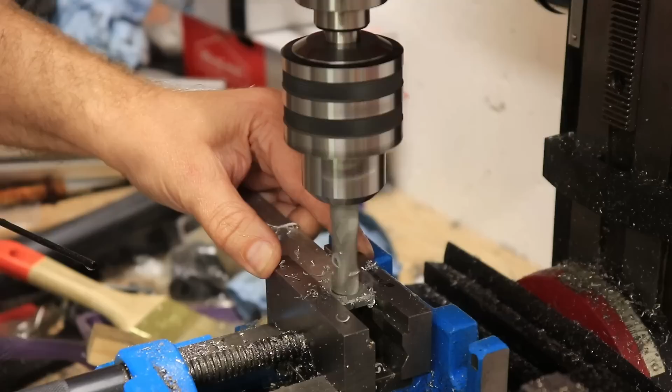My name is Igor and I'm actually curious about this video because I have absolutely no experience with 3D printed metal. I mean, how strong is it? Do we have that weak layer adhesion problem or something like that? And I will compare it directly with the FDM printed objects from ABS.

Now all these test specimens are printed by JLCPCB, and their primary service is manufacturing PCBs, but they also have 3D printing services. And I also presented their SLA and MJF 3D printed objects.

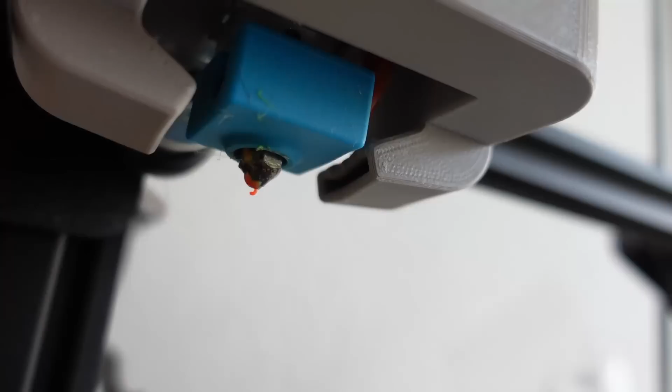I ordered these two to test their possibilities, because sometimes this is hard for printing. You cannot print with the supports because you cannot remove them from inside these channels, and this starts from a very small contact surface, and basically the supports you need only at this part here, and this printing looks really great. And the reason I need this from ABS is because I already printed this from PETG, and it melted here where the hot end doesn't have the covering from that silicone cover.

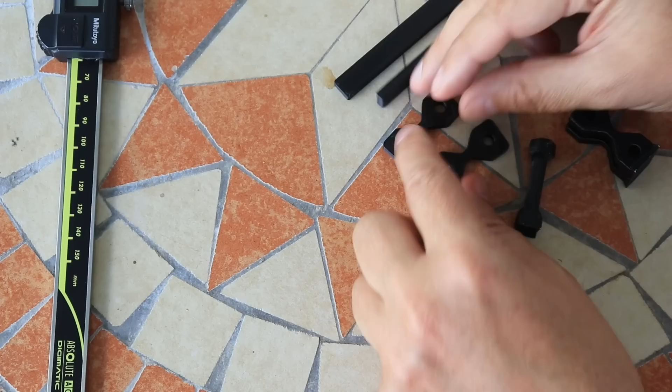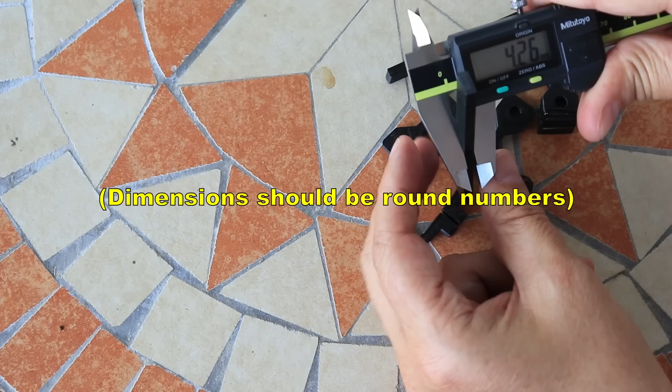And now these are those test objects from ABS for the bending and impact test, tensile test, layer adhesion, grip test, and the torque test. Quick check of the dimensional accuracy. 10.3 by 4.26, a little bit bigger. This should be 10 by 4 millimeters. A little bit bigger in cross section, the diameter. This should be 6 millimeters in diameter, and this is also a little bit bigger. So approximately 0.3, 0.4 millimeter bigger dimensions.

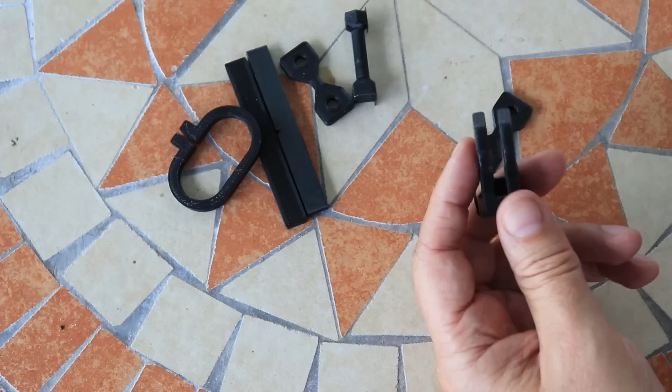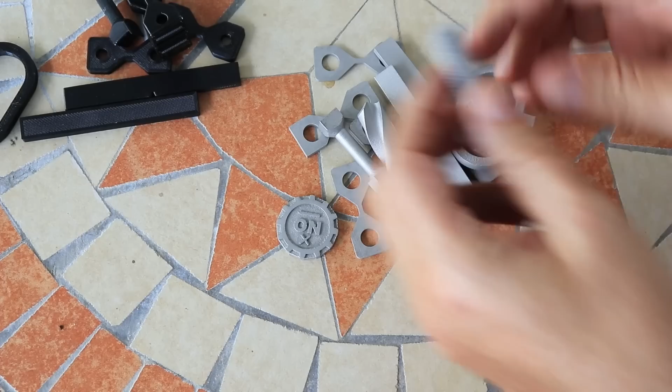So probably they use a little bit bigger flow rate. I hope this will result in better layer adhesion, but we will see that in a few seconds in the testing. Now let's see the metal parts. For the feeling, definitely real metal, and it's heavy. Yes, the coin. Well, this is mostly for aesthetic look, but this coin looks great. And I have two of them.

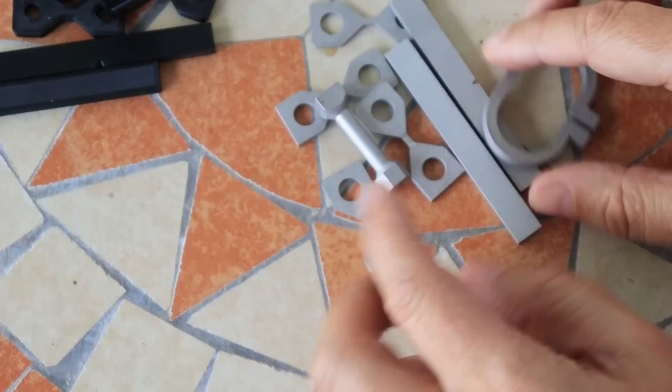A twist drill, diameter 13 millimeters, and we will see if it can be used as a real drill, I know, to drill at least some wood. These are test objects. Oh boy, this is really strong. For the grip test. And as I predicted, if this is strong like real stainless steel, then I will have problems with bending or breaking them, and definitely for the feeling this is very, very strong.

Probably this will not bend at all. I'm not sure if I can bend it in my experiments, but this is a comparison video. And I'm sure that this will not break under my half kilogram hammer. Maybe I will start immediately with the 1 kilogram hammer. Let's check the dimensional accuracy. This is a diameter of 6 millimeters and this is 6.06, so very accurate. This should be 10 by 10 millimeters, 10.1, 10.1.

10.09, 4.12. So it looks like the accuracy is better actually than with the ABS parts. And just in case this is printed in vertical position to see if we have some kind of layer adhesion. But I think they didn't print this in vertical position.

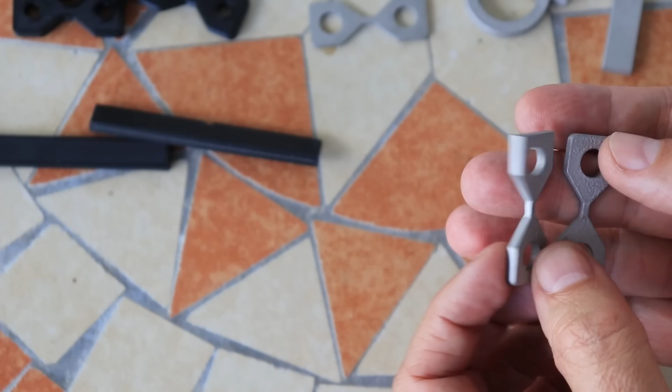2 by 2 millimeters in the middle, and this should be printed in vertical position, but I can see from this texture that this is printed in horizontal position, so actually I cannot test here the real layer adhesion, but now at least I will have 4 test specimens for tensile strength, and in all 4 cases the smallest cross-section area is 2 by 2 millimeters.

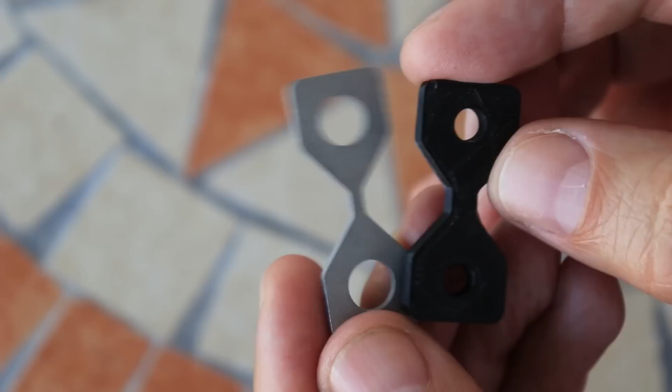Of course, this is my problem because I ordered this object. Theoretically, it should be printed in vertical position, but they oriented it in the most comfortable position for printing, and that's the horizontal one. Now, of course, these 2 cross-section areas are not equal, but to make it comparable, I will calculate the stress in megapascals or Newton per square millimeters. This means the force I will divide with the cross-section area, and in that case, the 2 values will be comparable with each other. And the reason for this is that I have no idea how strong is 3D printed metal, and I want to be able to break it with my equipment.

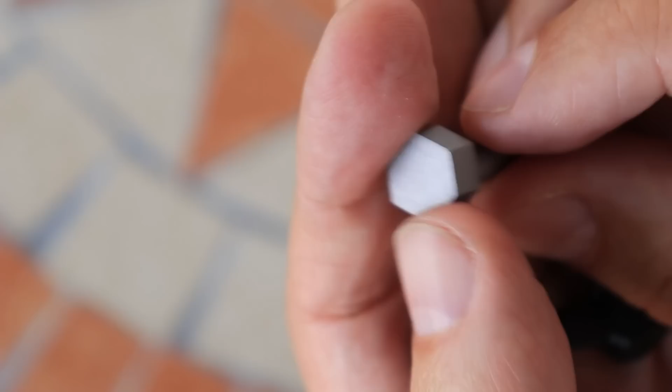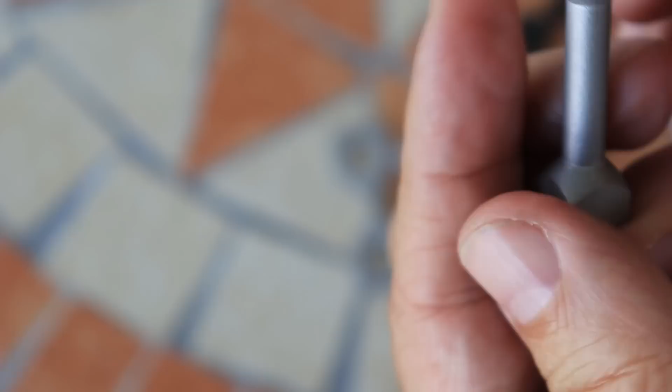Now, one thing I noticed that this object for the torque test is usually printed in horizontal position with FDM printing. This is printed with the bridging. And I noticed that this metal part is printed in vertical position. I can see that from this surface here. This means I will have at least one object where I test the layer adhesion, because if it is printed vertically and if it has some weaker layer adhesion or something like that, it will break here much easier. So this will be very important not only for the torque test but for the layer adhesion too.

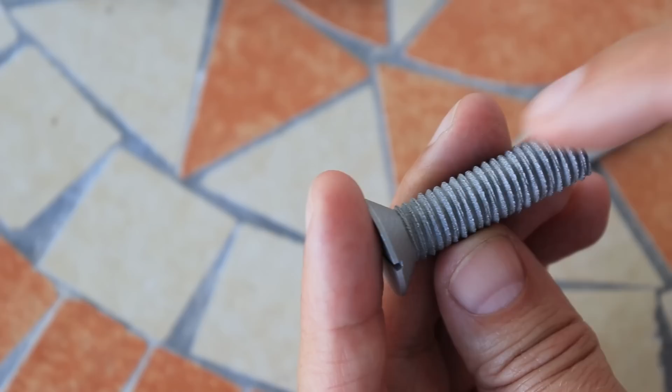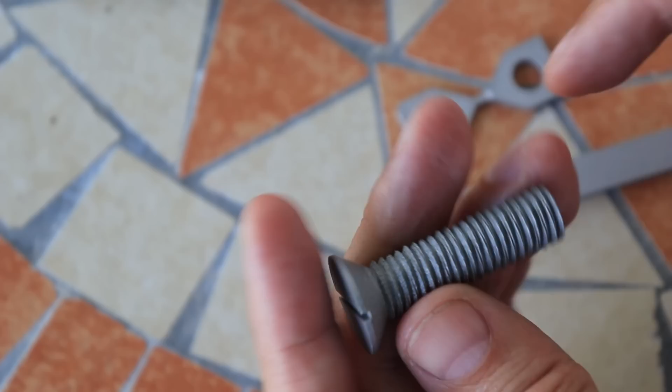So this is not a regular bolt, it has 2 threads on it, one right and one left sided. I printed it for the joke because I want these nuts left and right sided to use on one bolt. But unfortunately it doesn't work. But now I know because the size is a little bit bigger on all test objects by approximately 0.1 millimeter. So this means that I should reduce the size in X and Y direction by maybe 1 or 1.5%. In that case it will be functional.

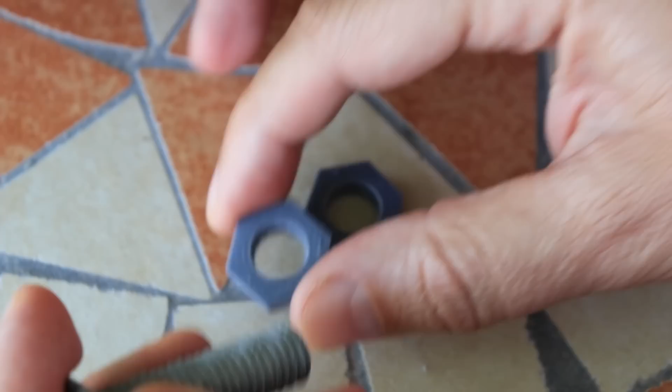But of course I will use it, but not with these regular nuts, but I will 3D print one, which I will extend the size in XY direction by 1.5%. And in the meantime I printed these nuts. I raised the size by 3%. As you can see, it works perfectly with this metallic bolt. It's a pity that it doesn't work with these metallic nuts. It would be a more elegant solution.

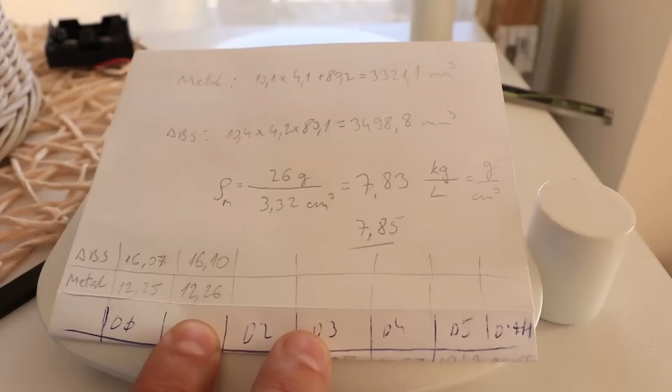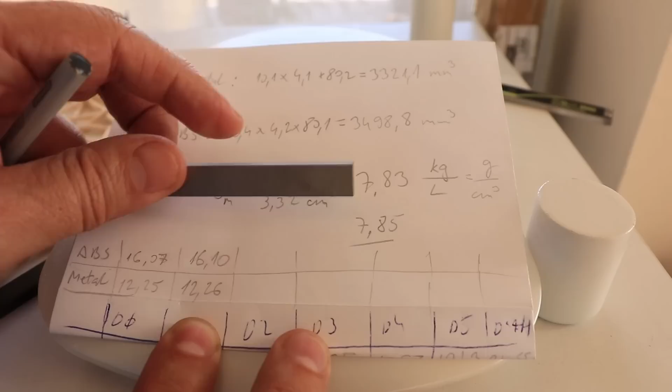Just for comparison, I'm curious about the density of this object. For the bending test, it is a box, so I can measure the dimensions, and the weight is 26 grams. Just for comparison, the ABS is 3 grams approximately. And I measured the exact dimensions of this test object. This is in cubic millimeters, but if I divide 26 grams with 3.32 cubic centimeters, I will get 7.83 kilograms per liter or grams per cubic centimeter, and this is very close to the official 7.85 kilograms per liter density of the stainless steel. This means that this is a really solid object. There are no bubbles or gaps or something like that inside.

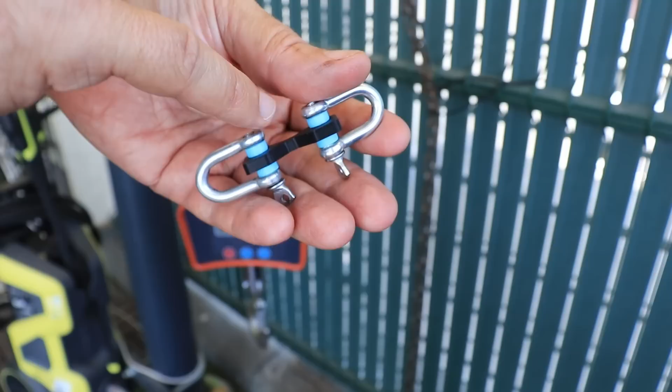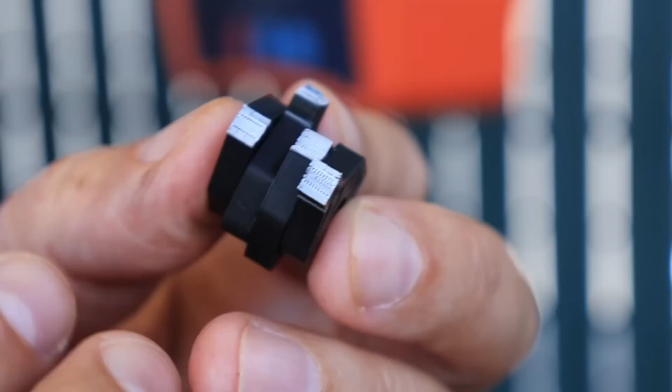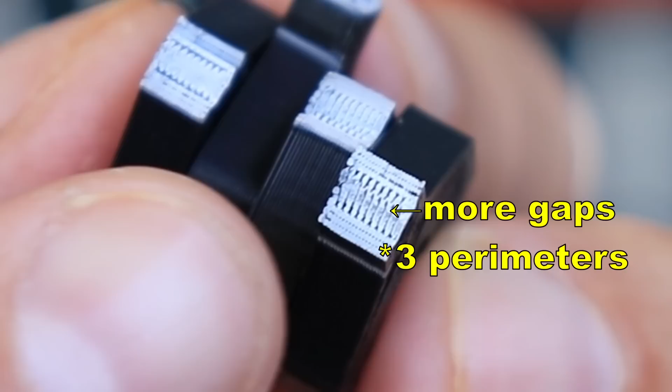And I'm starting with the ABS tensile test. This test object is printed in horizontal position, and the smallest cross-section area is theoretically 4 by 4 millimeters, but it's a little bit bigger, but I will calculate it in that stress equation. Now for the feeling, this was weaker than usually the tensile strength of the ABS, but now I noticed that they didn't use the maximum number of perimeters, but 100% infill and only 3 perimeters. Probably this made these test objects a little bit weaker than my usual test objects when I'm testing ABS or any other material.

And now the layer adhesion test. This test object is printed in vertical position, and again the smallest cross-section area theoretically is 4 by 4 millimeters. And again I can see maybe 3 perimeters, and the rest is probably 100% infill.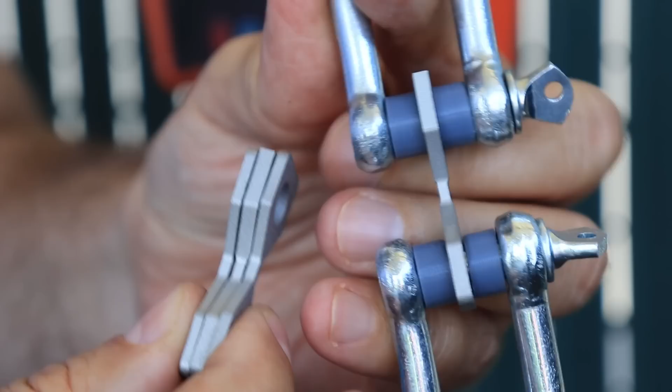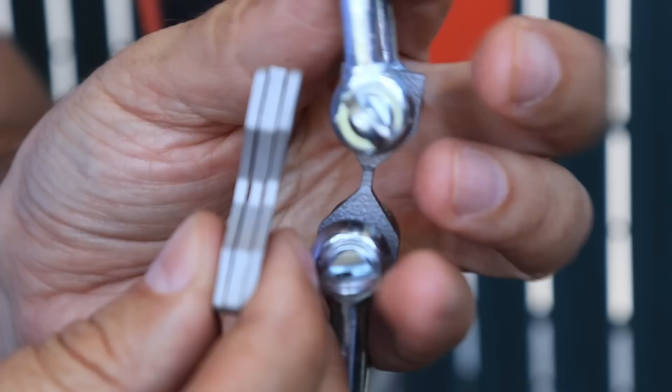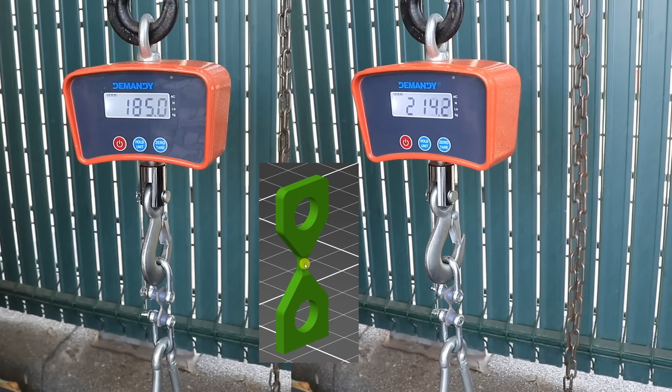And now on the metallic test objects, don't forget the smallest cross-section area here is 2 by 2 millimeters. Theoretically, this and this one in the middle should be for testing the layer adhesion, but as I mentioned earlier, they are all printed in horizontal position. First objects are those which had to be printed in vertical position. Smallest cross-section area is the same, only it is wider on the holding parts.

And these are originally designed to be printed in horizontal position, but in the middle the size is the same, so I should get similar values here. And they broke properly on the smallest cross-section area. It was so hard to break it that I didn't watch the scale, so I don't know the numbers yet, but you already saw them a few seconds ago.

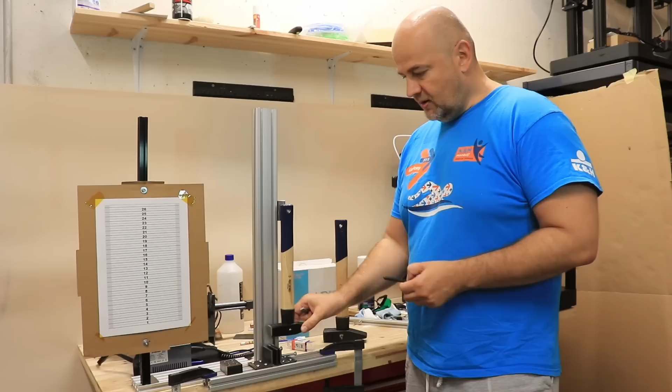And now the IZOD impact test. I will start with the ABS, and here I have this half kilogram hammer which will swing to the other side, and from the difference in potential energy I can calculate the energy used for breaking the test object. Now in this equation we have mass, which will be half kilogram in this case, we have g, the gravitational acceleration, and we have the difference in height, which has to be in meters. And I will divide this with the cross-section of these test objects, and I can get the energy in kilojoules per square meter.

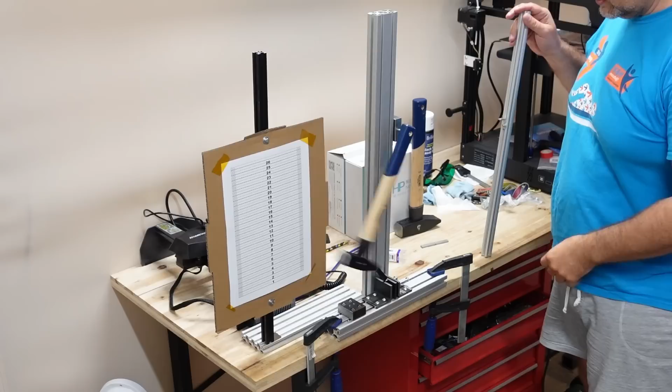Now with this metallic one, probably it will not break under this half kilogram hammer, so I will replace it with this 1 kilogram hammer, but I have the feeling maybe this one too will not break this test object, but this is the maximum I can produce with this equipment. Okay, let's start with the ABS part. ABS. The zero position.

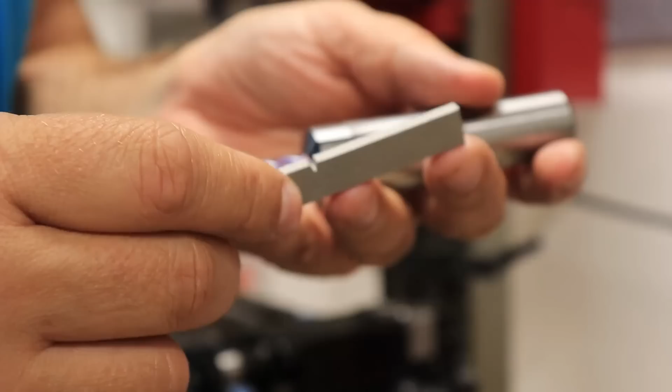Even the ABS was very tough material. And now this is the 1 kilogram hammer. Stainless steel. I cannot see even the smallest bending on it. I want to try to mill down this cross-section area. The thickness is 4 millimeters, but I will try to make it approximately 1 millimeter, and I hope in that case I have a chance to break it with my equipment.

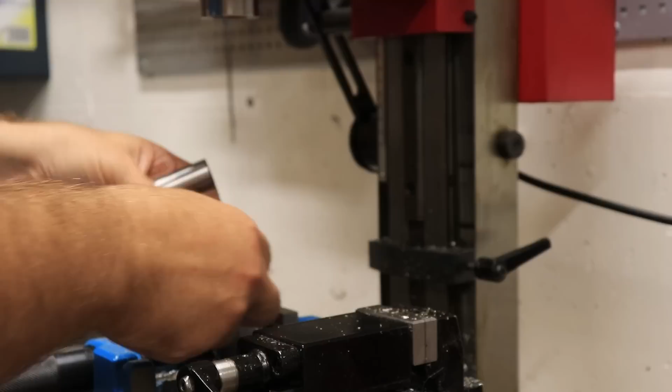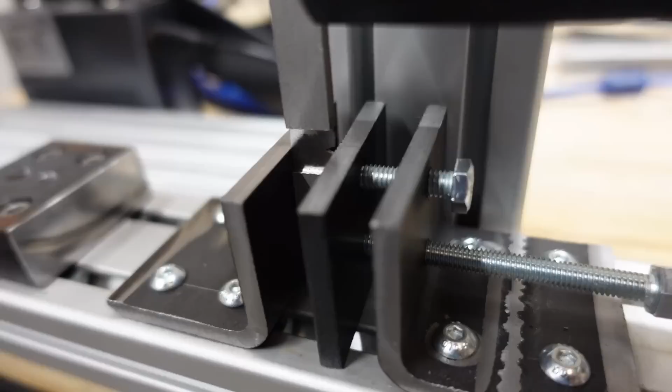Definitely for the feeling like real steel. And the new thickness is exactly 1 millimeter now. What do you think? Will it break under the 1 kilogram hammer now? Let's find out. Second attempt with the 3D printed metal, but now the cross-section area reduced from 4 to 1 millimeter. 3D printed metal with reduced thickness. And the zero position. It didn't break. I hope you can see it didn't even deform.

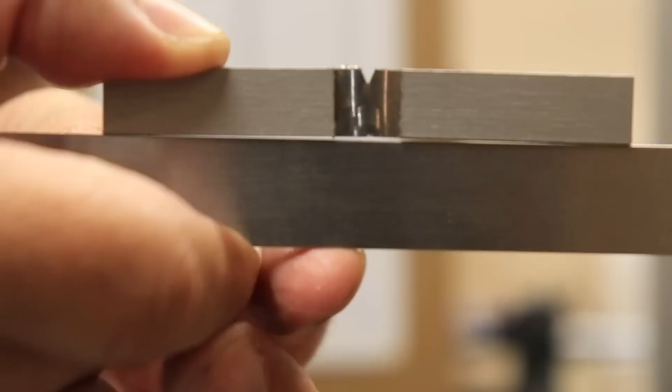So even with this reduced thickness, I cannot measure the real impact strength of this material with my equipment, but at least I know what is the minimum, but the real impact strength is of course much higher. But at least I know one more thing, and that's that it is very easy for machining. I can see absolutely no gaps or bubbles or something like that on this cut surface. And for the feeling, that's why I like these manual milling machines, it was like a regular steel. At least I can see that it started bending, but it was very far from breaking.

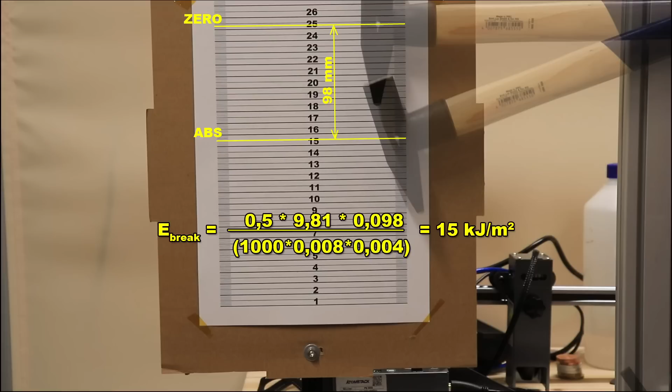Here you can see the position of the half kilogram hammer after breaking the ABS part. This value is good for filament and average for ABS material. And here you can see the equation with the 1 kg hammer, and we reduced it by 1 mm thickness. But since it didn't break, this value only shows the possible minimum breaking energy.

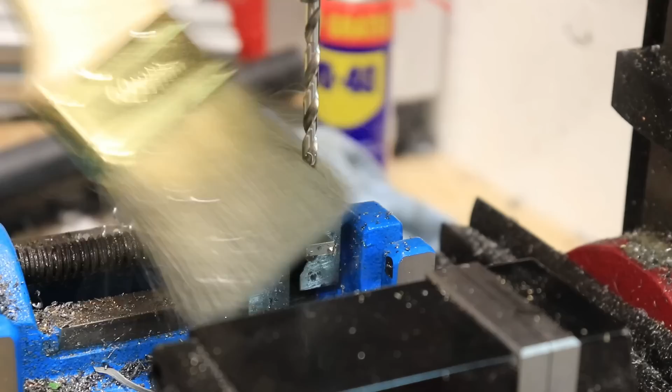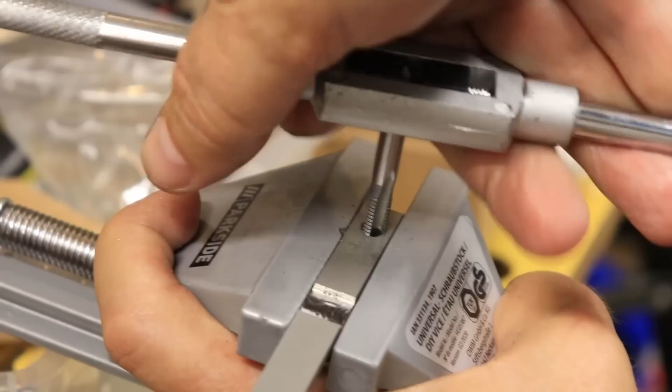One more thing I want to try, but probably it will not be a problem. I want to see how easy it is to drill and tap a hole. It will be M6, this means I have to drill a 5 mm hole. For the feeling it was very strong, stronger than carbon steel, so definitely a really great material. The hole is perfect, and now let's create a thread inside. So the cutting was really hard, definitely harder than regular carbon steel, again I can confirm that. And this is an M6 bolt, and it works.

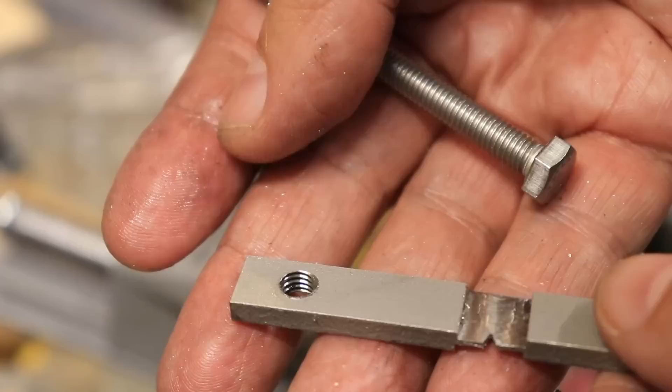And now the 3-point bending test, but I know I will have a problem again with this metal part, but I hope I will have some measurable deformation, and since this is a comparison video, I want to see how much load I need to have the same deformation with the ABS part. Now I notice that this is not 100% perimeters, but they use 3 perimeters and 100% infill. So this deformation is not 100% comparable with my test, where I use the maximum number of walls, the perimeters.

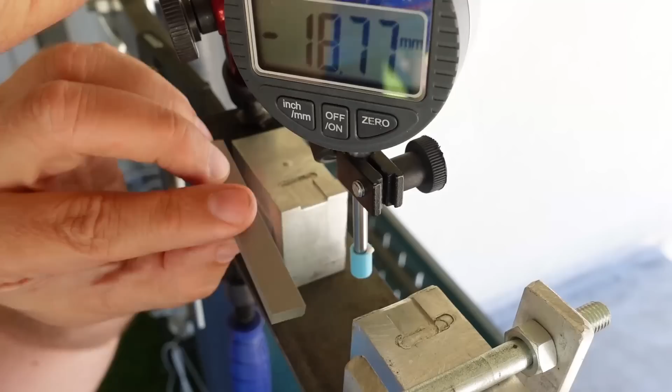Well, it is better if you don't see it, but here I used all my gravitational force, and I could bend it only 0.8 millimeters.

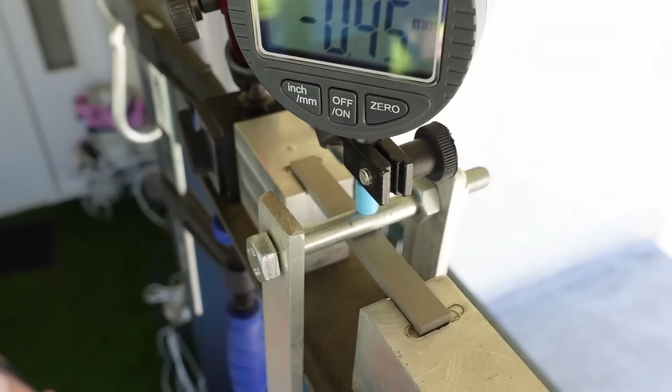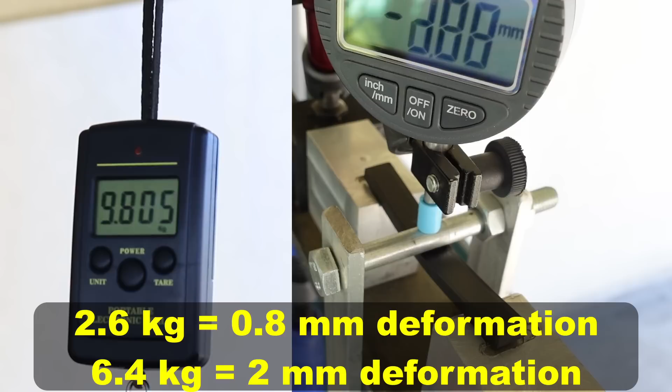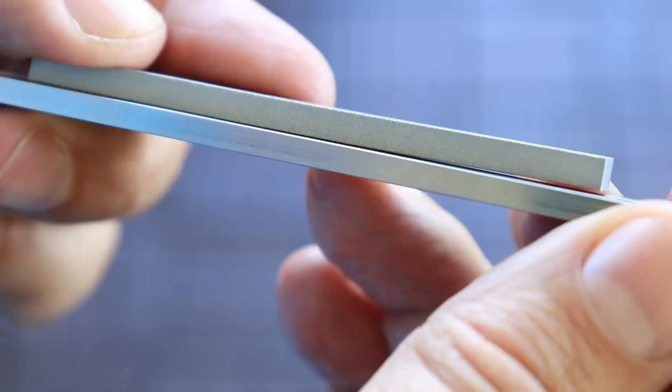And it looks like I have some permanent deformation. And now ABS. And here for 0.8 mm deformation I needed only 2.6 kilograms. And usually I record the load for 2 mm deformation. Well, so the ABS part started with the bending and then it broke completely. And on the metallic part I can see very minimal permanent deformation.

And now on regular torque or twist test, the diameter of the cylindrical part is 6 mm, but actually this is designed for the plastic, because I'm sure I cannot twist this 6 mm steel. Imagine, can you twist an M6 bolt, which is actually weaker than this solid 6 mm? I'm not sure, I will do the test with the ABS and then I will think something with the steel.

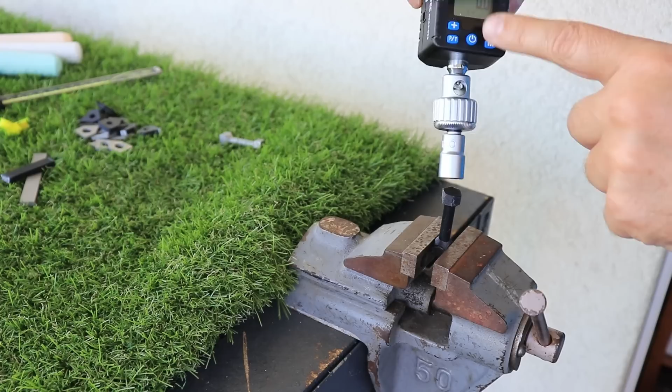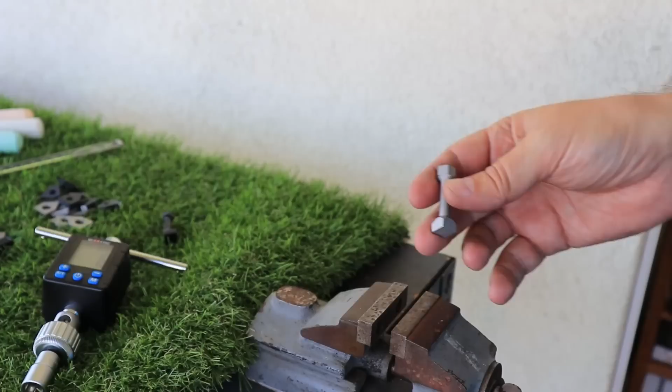So this side goes into the vise. And the other side goes into this digital torque meter. It can record the peak of one movement, 1.5, oops, and 1.6 was the peak. Let's give it a try, but I don't think I can deform this, especially with this small arm. It was overloaded.

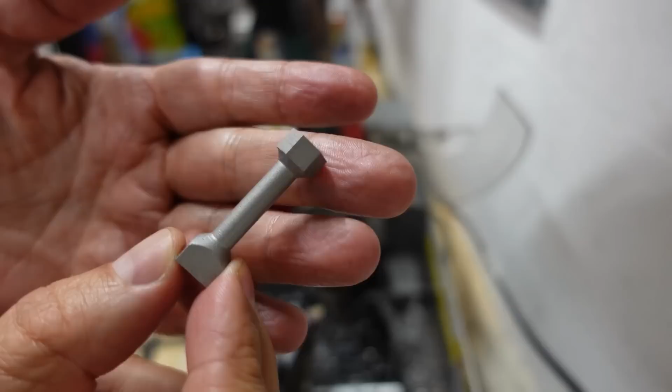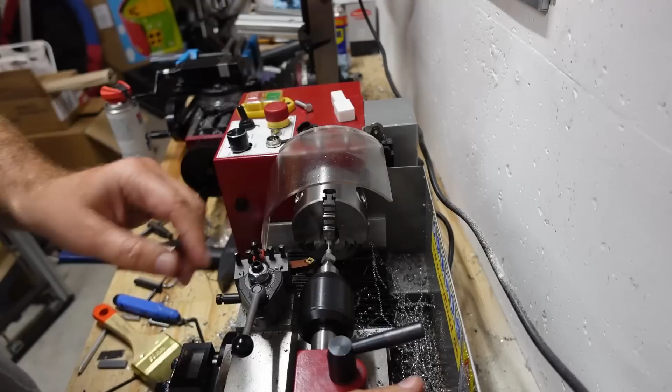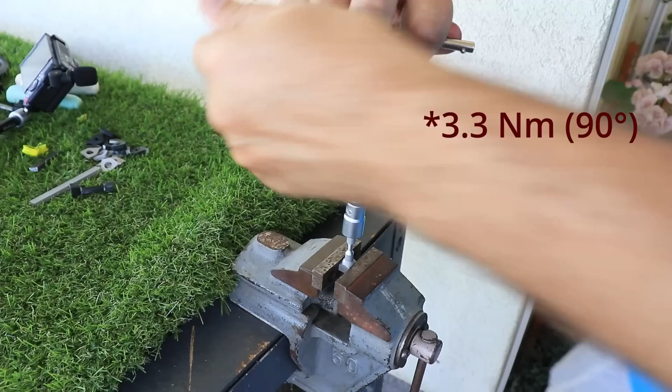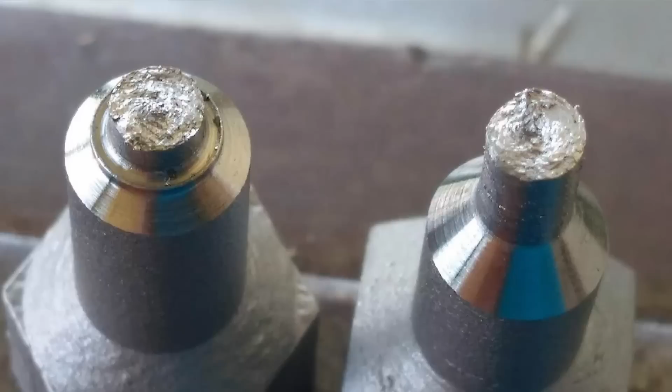I will try to reduce the diameter on a lathe machine, and I will try to calculate the stress with the new cross-section area. And now the diameter is reduced to 3.05 millimeters. I hope I can have some deformation now. And now with reduced diameter. 3.2, 4.1, 4.1 was the peak. And I could break it. And it broke probably along the layers, so it has theoretically some weaker layer adhesion, but anyway this was very strong.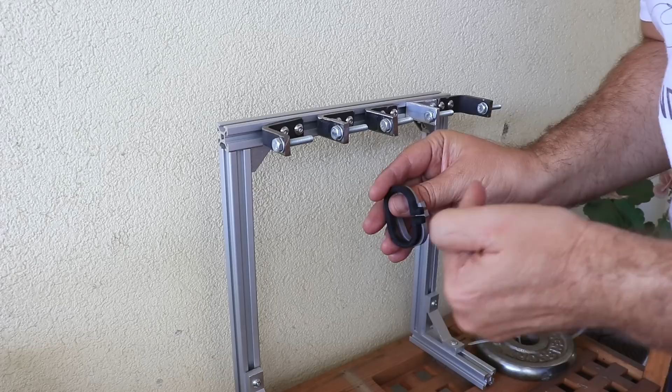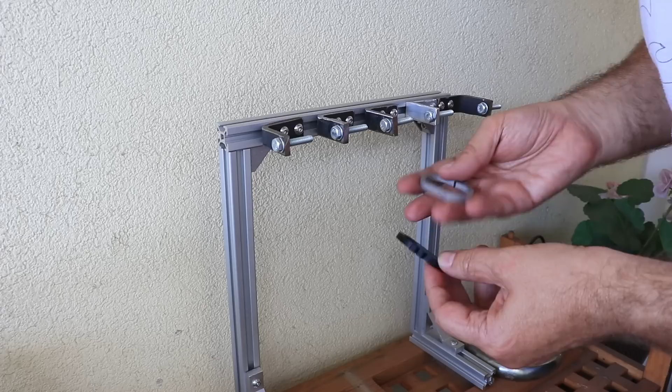And now my regular creep test. The creeping is the deformation of the material during the constant load. These are my standard test objects from ABS and from metal, and I will place on them this 1.25 kilogram load, and I will follow the deformation in next 5 days. I will measure the distance between these two reference surfaces. It should be 12 millimeters exactly. Now I measure on ABS it is 12.1 and on the stainless steel it is 12.2. But it doesn't matter because with the creeping I need the deformation, the difference between 2 days.

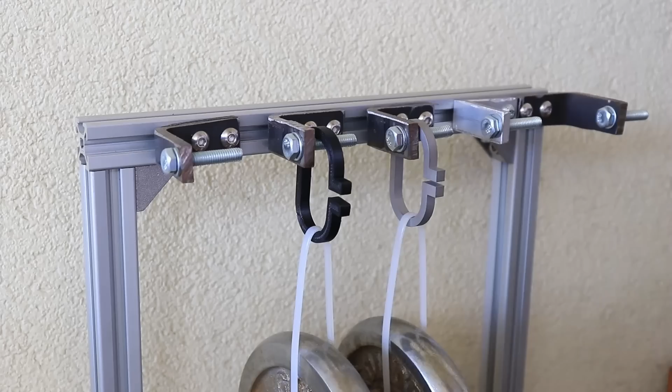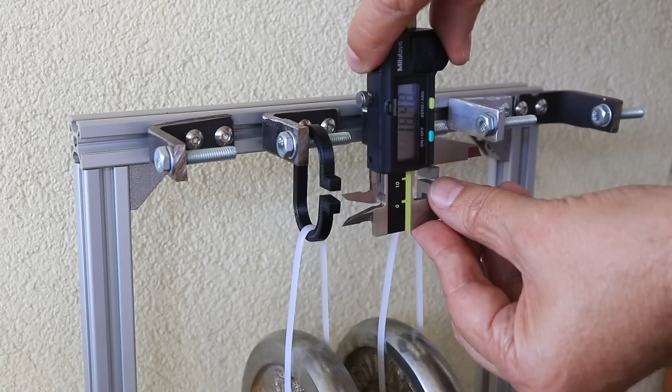Almost visual, no deformations here. For ABS I'm locking the position with this part here, so it can be more accurate measuring. 16.07. Now unfortunately the metal didn't deform enough, so it cannot fit inside this M3 bolt, but it is strong enough so I can measure it without deformation. 12.25. And I will repeat this measuring once a day next 5 days, and on last day I will place it inside the oven on 50 degrees Celsius and measure that additional deformation. But the measuring will be off camera, only I will create a picture once a day.

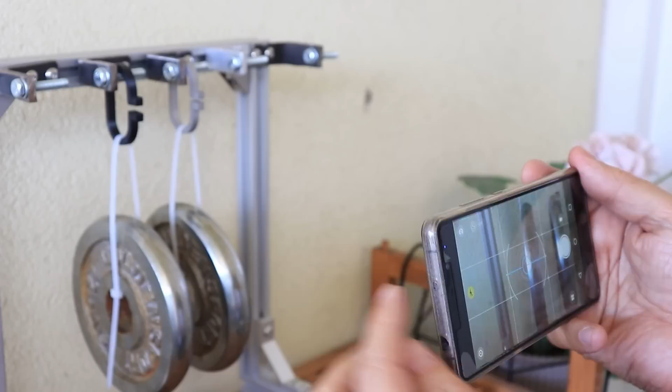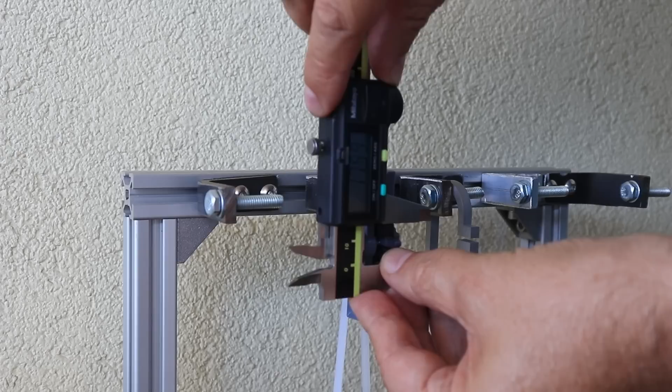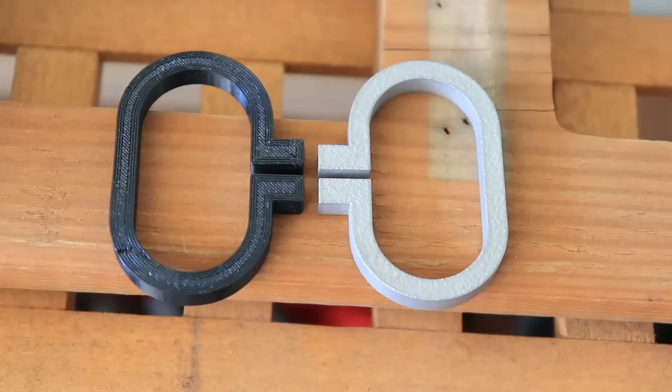So this is day 0, this is day 1 after 24 hours, day 2, day 3, day 4, and now 1 hour on 50 degrees Celsius inside the oven. 1 hour passed and actually the temperature inside was 53 degrees Celsius, and now let's measure them. And our last measuring after this heating. Hmm. 16.24, almost no deformation, no creeping. And the stainless steel 12.24, no deformation at all. And now removing of the load. After only approximately 5 minutes, almost no permanent deformations on these two objects, just a little bit on the ABS.

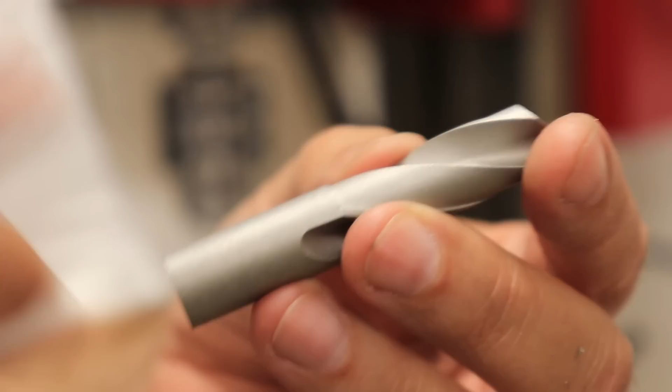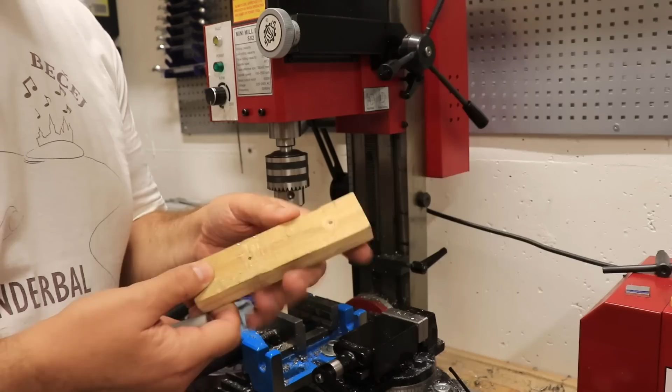And now let's see the possibility of this twist drill. A few months ago I created a short with a plastic 3D printed twist drill, and I got so many evil comments there because people don't really understand the point of that video because they don't read the text. The point was that basically that can also be used as a twist drill as long as the drilled object is softer than the material used for the tool. In that video I drilled the apple and it was drilled without any problems. Later, but not in that video, I tried to drill this wood even with this pilot hole, exactly this one here, and basically it melted. And now I will try to drill the same wood with this 3D printed metal twist drill.

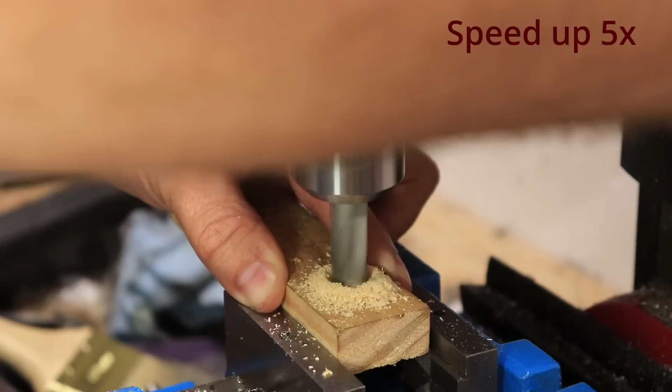Now let's see if I can drill aluminum. This is 5 mm thickness, but I will create a pilot hole with a 5 mm twist drill. And I will use some cooling lubricant here.

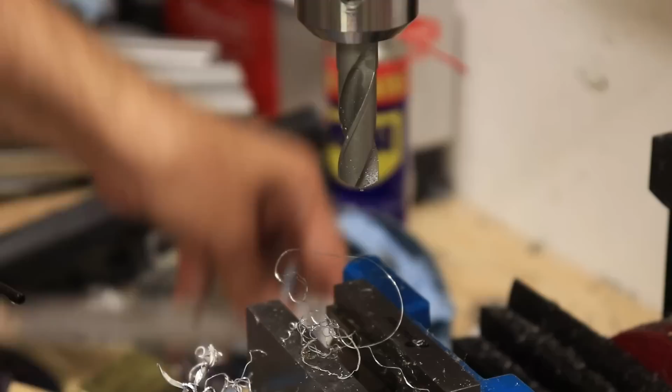This is crazy. I didn't expect this. I wanted to try the wood, but I didn't expect that it will cut aluminum. And let's check the edge of the twist drill. Well, I'm not sure if it's visible on camera too, but this edge is in perfect shape and it's still very sharp, both edges.

And basically this is another proof of the great layer adhesion with metal 3D printing, because this is printed in this position, and if it had any weakness in the layer adhesion, this could easily break along the cross section. And now let's analyze the results in this Excel table.

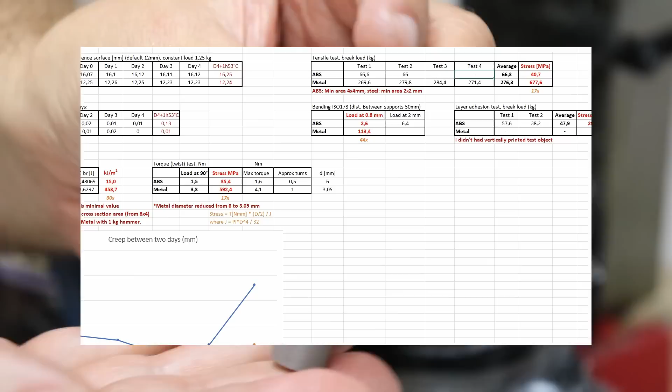I'm starting with the creep test, and these are the distances between two reference surfaces, but I actually need the changes between 2 days. And that's why I prepared this table. 0 means no creeping. There are some negative values, but probably that's the result of inaccuracy in measuring. And these are all very small values, even this.

The tensile test. For ABS I have 2, but for metal I have 4 because unfortunately all 4 test objects are printed in horizontal position, and that's why I don't have here any. And it is very important to mention that this is the breaking load in kilograms, but I calculate the stress because the cross-section is not equal in 2 cases. And basically this is what I need for the comparison.

In a graph you will not see this difference well. That's why I add here the multiplier, so this is how many times metal is stronger than ABS. For bending I don't have to change, so this is the load in kilograms, and it was a very big difference here.

For the impact test, this is the value for the ABS. This is an average value for the ABS, but of course very good compared to the other filament types. But metal, don't forget that here I calculated with a 1 kilogram hammer and reduced cross-section area, but even then this is only the minimum since the test object didn't break.

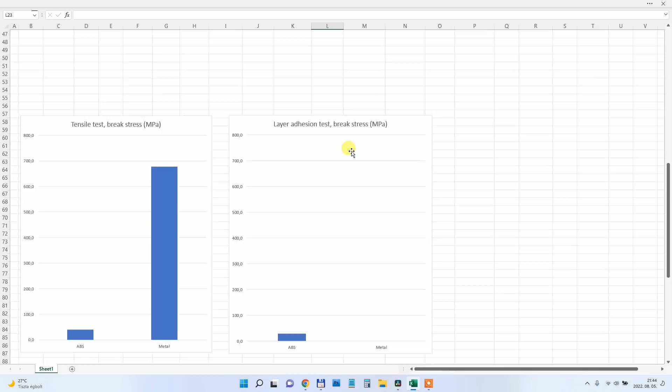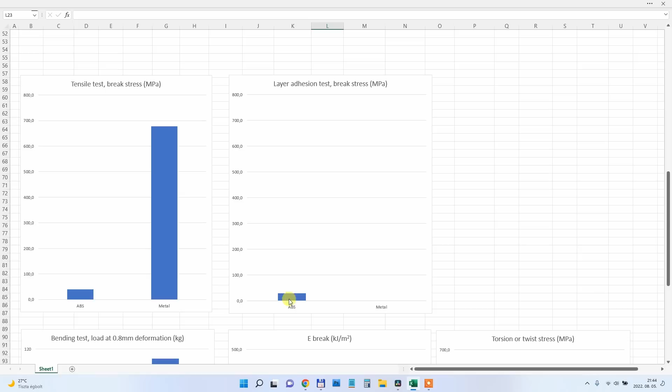Basically I can show you here in the graph, but don't forget this is a very small value. I checked earlier results. And here you cannot see the difference well, but you can see that the metal is much stronger compared to the ABS. Interesting that here the layer adhesion is not much weaker compared to the tensile strength. And here you can see the bending load for the 0.8 millimeter deformation, the breaking impact strength in kilojoules per square meter, and this is the torsion or twist stress in megapascals.

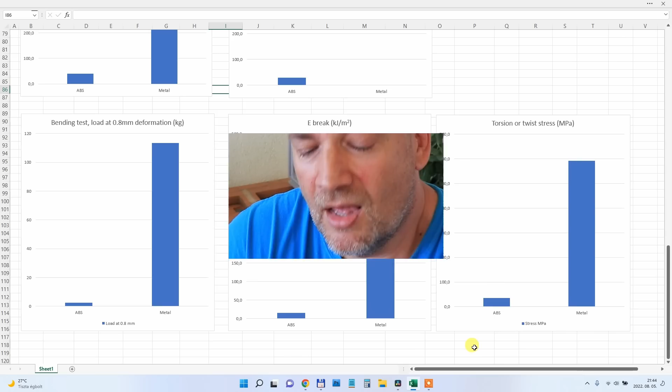And now the conclusions. First about the ABS. Interesting, very good quality ABS, and this is the first time that on this creep test I don't have the deformation, almost not even on the first day, and especially you saw after 53 degrees Celsius for 1 hour I don't have any additional creeping on this ABS. Unfortunately they didn't tell me what brand they use here, that's their secret.

The only weakness I could see was on the tensile test, but when I analyzed the cross section I can see they use 100% infill, and there I can see a little bit more gaps than usual, since I print using the maximum number of perimeters.

Now about this 3D printed stainless steel. The SLM 3D printers are very expensive, and that's why it is good to know where you can use 3D printing services. And now I know that this is really great quality because it is like CNC machined stainless steel. I cannot see any kind of weakness in these objects. And this was most impressive, basically, to use this 3D printed twist drill like a tool to drill aluminum. Of course, don't use this to create this kind of tools. A regular twist drill is much better, of course, and probably cheaper.

By the way, the approximate price of this twist drill would be $18, but when you upload the STL files before you do the purchase, you can see the estimated price of the objects. I'm not sure if it's according to volume or maybe the Z height or something like that, but you can see the summary before you do the ordering.